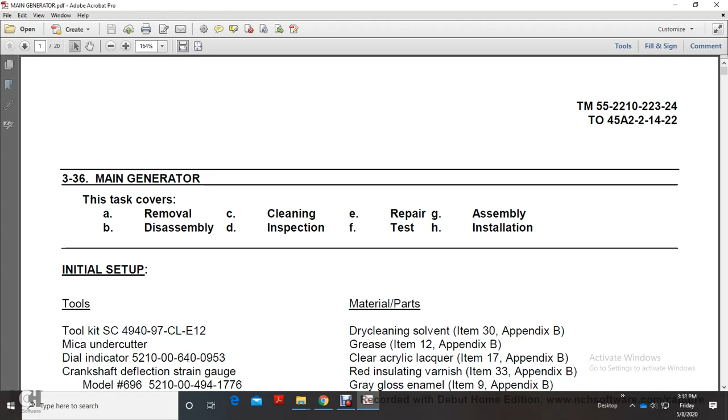Main generator removal, disassembly, cleaning, inspection, repair, test, assembly, and installation. Toolkit required.

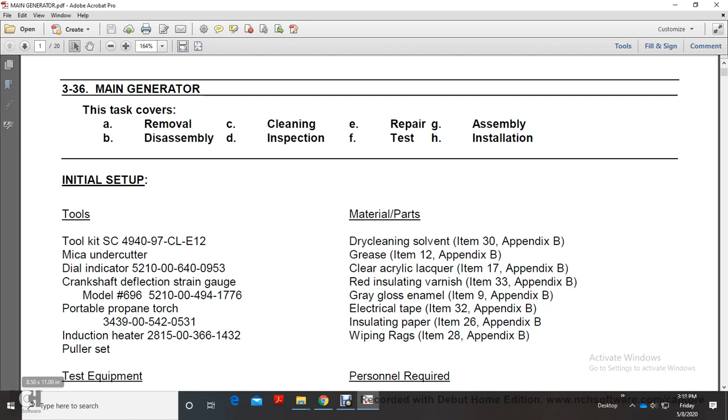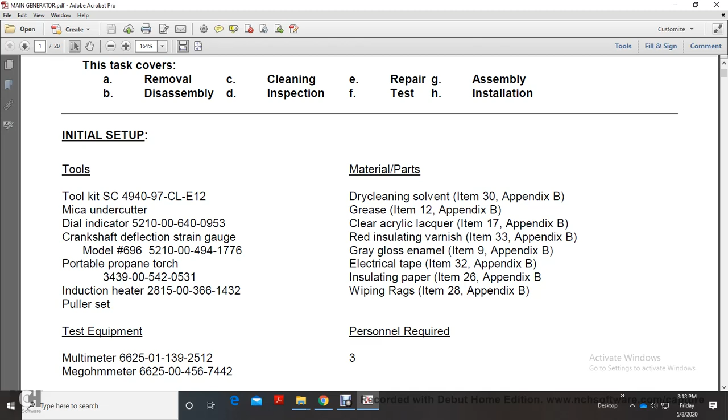Equipment needed: SC494097CLE12 mica undercutter, dial indicator, crankshaft deflection strain gauge, portable propane torch, induction heater, puller set, test equipment, multimeter, mega ohm meter, dry cleaning solvent, grease, clear acrylic lacquer, red insulation varnish, gray gloss enamel, electrical tape, insulating paper, wiping rags. Personnel required.

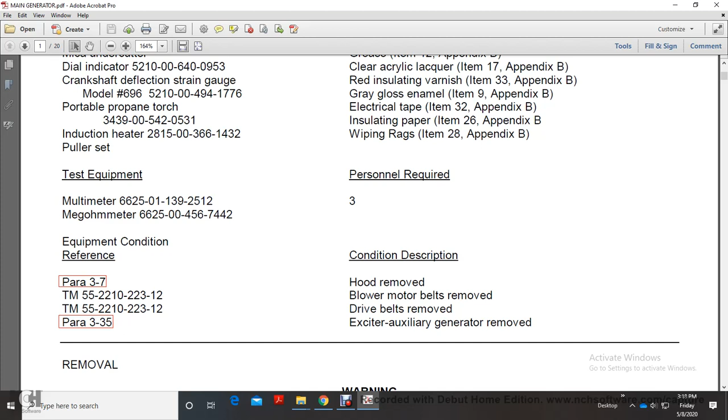Condition description: hood removed, blower motor belts removed, drive belts removed, exciter auxiliary generator removed.

Warning: remove rings, bracelets, wristwatches, and neck chains before working around the locomotive. Jewelry can catch on equipment, cause injury, may short across electrical circuits, and cause severe burns or electrical shock.

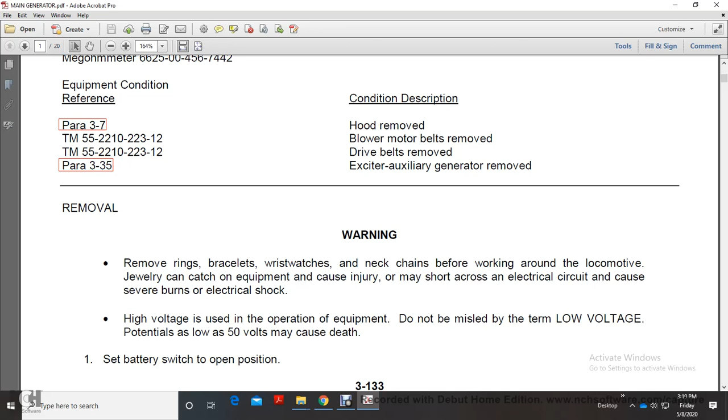High voltage is used in the operating equipment. Do not be misled by the term low voltage; potential as low as 50 volts may cause death. Set battery switch to open position.

Note: if the repair of the main generator is limited to resurfacing the commutator, refer to step 54f(l) below.

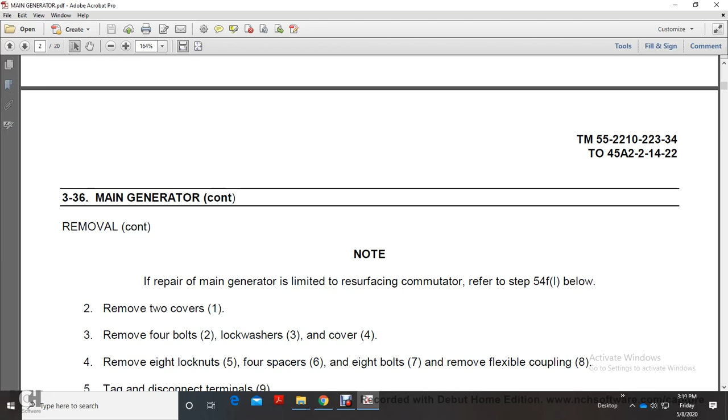Remove 2 covers (1). Remove 4 bolts (2), lock washers (3), cover (4). Remove 8 lock nuts (5), 4 spacers (6), 8 bolts (7).

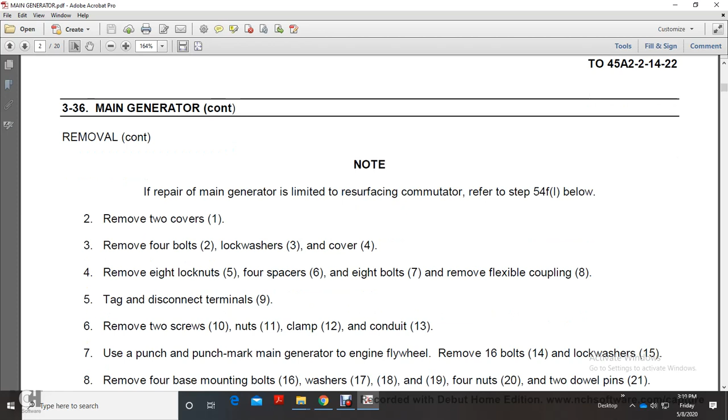Remove flexible coupling (8). Tag disconnect terminals (9). Remove 2 screw nuts, clamp (12). and conduit (13). Use a punch to mark the main generator to the engine flywheel.

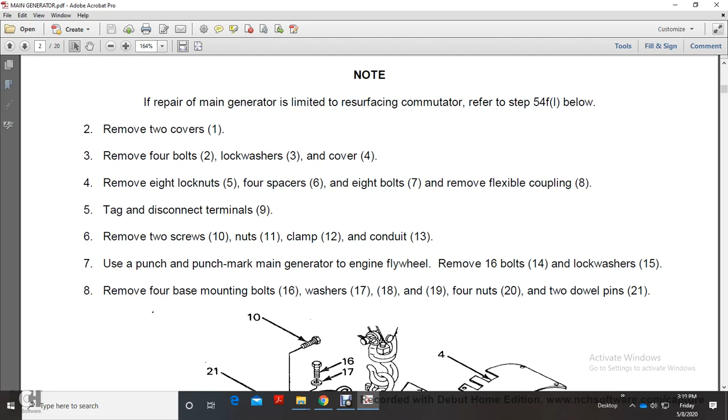Remove 16 bolts (14), lock washers (15). Remove 4 base mounting bolts (16), washers (17, 18, 19), 4 nuts (20), 2 dowel pins (21).

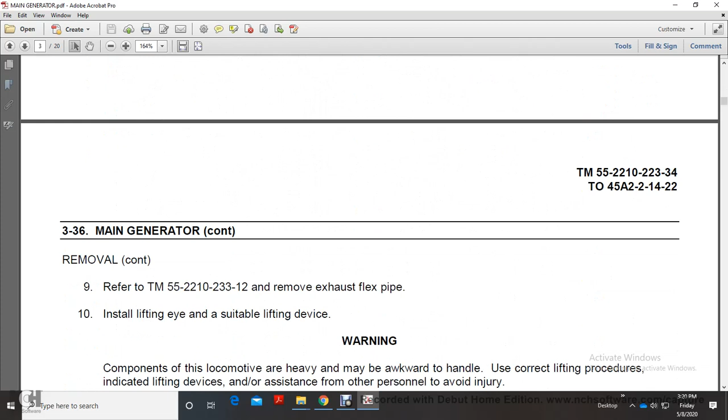Refer to technical manual 55-2210-233-12. Remove exhaust flexible pipe, install lifting eye and suitable lifting devices.

Warning: components of a locomotive are heavy and may be awkward to handle. Use correct lifting procedures and indicate lifting device assistance for other personnel to avoid injury. Caution: use extreme care to prevent main generator damage.

Emergency fuel shut off assembly. Move main generator toward air compressor. Slowly lift main generator from base and place on a suitable support device in a horizontal position.

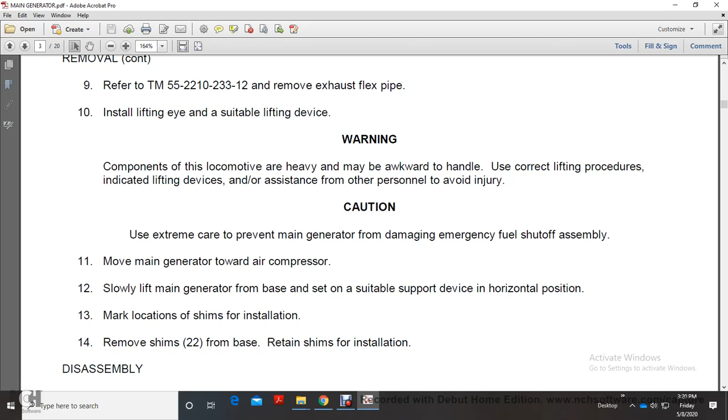Mark location of shims for installation. Remove shims (22) from the base. Retain shims for installation.

Disassembly. Warning: components of the main generator are heavy and may be awkward to handle. Use correct lifting procedures, indicate lifting devices, and assistance of other personnel to avoid injury. Heated parts may cause injury if hand protection is not worn when handling; wear protective gloves for maximum protection. Note: some parts may need to be heated to release them from their shrink fit.

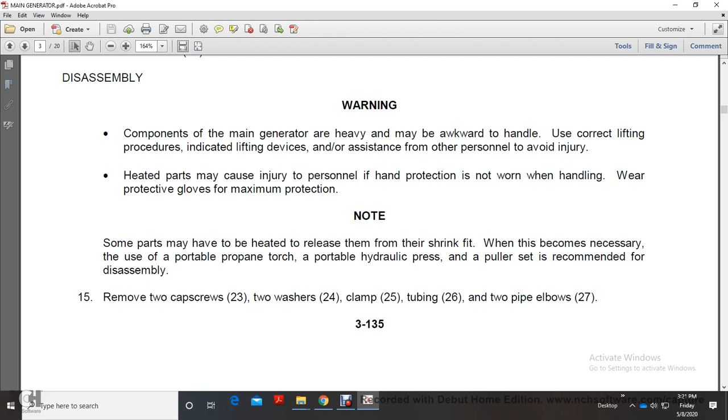When heating becomes necessary, use of a portable propane torch, a portable hydraulic press, and a puller set is recommended for disassembly. Remove 2 cap screws (23), 2 washers (24), clamp (25), tubing (26), 2 pipe elbows (27).

Remove nut (28), lock washers (29), then reinstall the nut to serve as a stop when pulley (30) is removed. Install pry bars between stator frame (55) and pulley (30). Use a torch to heat the pulley (30), apply pressure to the pulley, and loosen it.

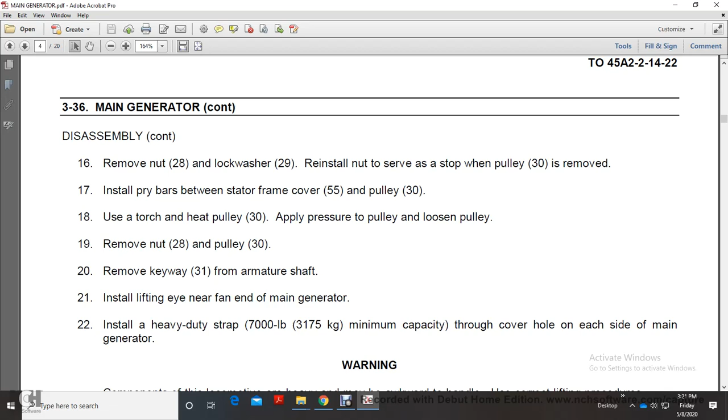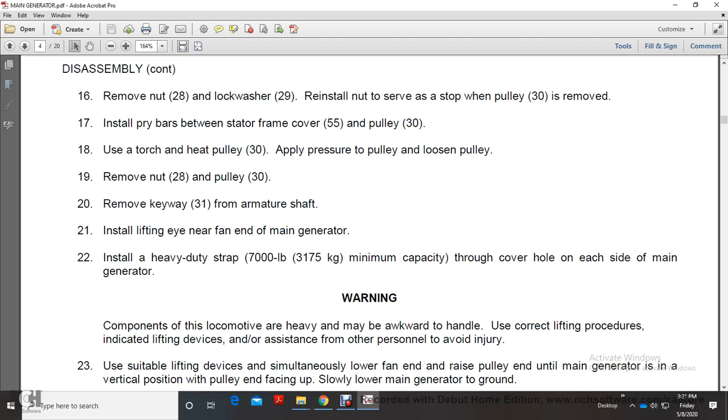Remove nut (28), pulley (30), and keyway (31) from the armature shaft, and install a lifting eye at the fan end of the main generator frame. Install a heavy duty strap, 7,000-pound minimum capacity, through the cover hole on each side of the main generator.

Warning: components of the locomotive are heavy and may be awkward to handle. Use correct lifting procedures, indicated lifting devices, and assistance of other personnel to avoid injury.

Use suitable lifting devices to simultaneously lower the fan end and raise the pulley end until the main generator is in a vertical position with the pulley end facing up, then slowly lower the main generator to the ground.

Remove 8 bolts (32), washers (33). Use the spring to hold brushes from the holder. Lift brushes far enough out of the brush box to prevent them from sliding back against the commutator.

Wrap a piece of insulating paper around the commutator to protect it while handling, and install lifting eyes on each side of the stator frame (55).

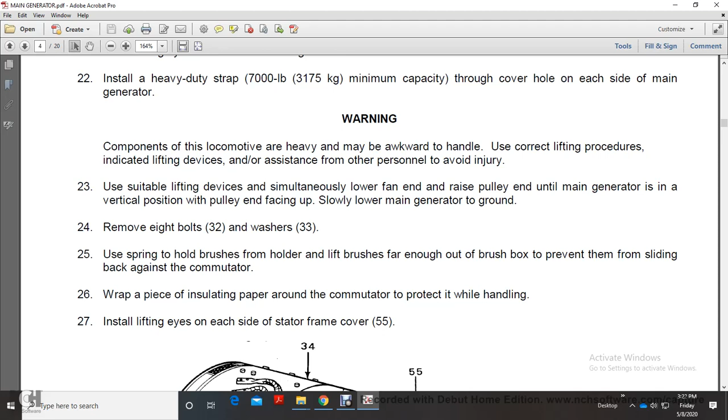Use a suitable lifting device and slowly lift the stator frame assembly (34) and armature (43), then lower the stator frame assembly to the ground to rest on a suitable support device.

Install wooden blocks under the bearing cartridge (42) to prevent it from sliding down on the shaft. Remove 6 bolts (35), washers (36). Remove outer bearing cap (37), gasket (38).

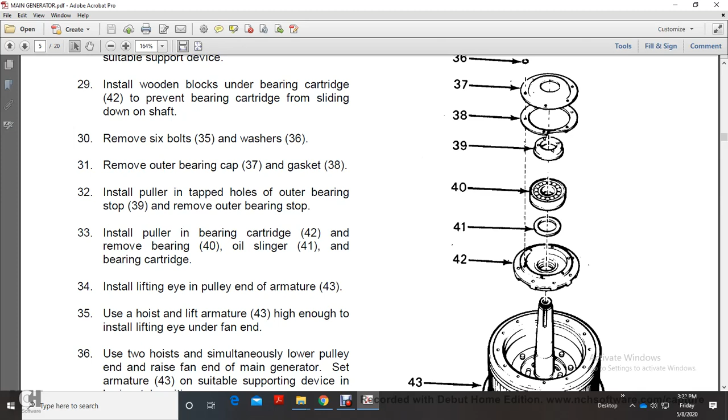Install puller in tapped holes of outer bearing stop (39). Remove outer bearing stop, install puller on bearing cartridge (42). Remove bearing (40), oil slinger (41), and bearing cartridge.

Install a lifting eye at the pulley end of the armature (43). Use the hoist to lift the armature high enough to install a lifting eye under the fan end. Use 2 hoists to simultaneously lower the pulley end and raise the fan end of the main generator.

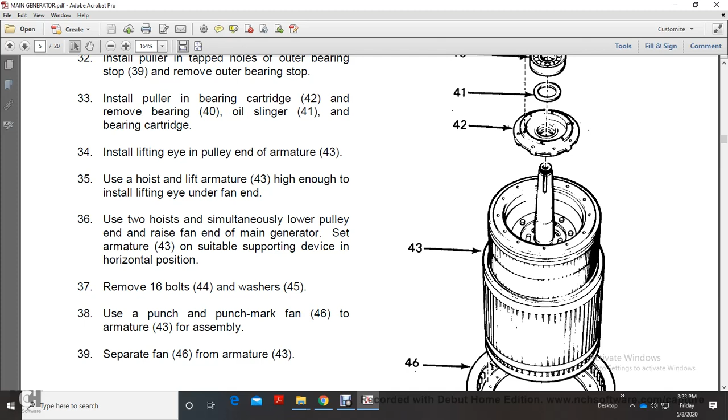Set the armature on a suitable supporting device in the horizontal position. Remove 16 bolts (44), washers (45). Use a punch to mark fan (46) to armature (43) for reassembly.

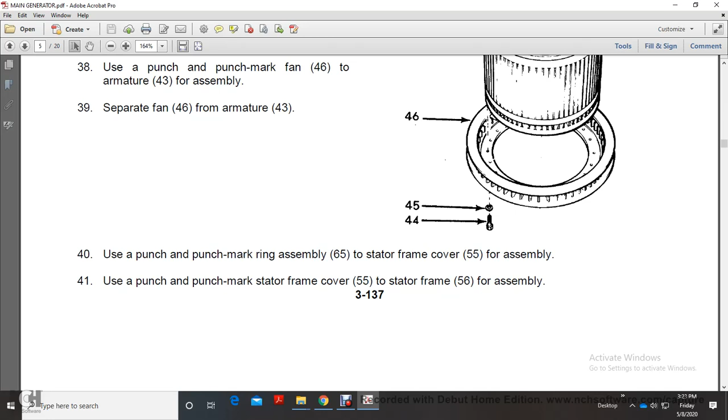Separate the fan (46) from the armature (43). Use a punch to mark the rings (65) to the stator frame cover (55) for assembly. Use a punch to mark the stator frame cover (55) to the stator frame (56) for assembly.

Disassembly continued: remove 8 bolts (47), lock washers (48). Remove 8 bolts (49), 8 lock washers (50), washers (51). Remove 2 bolts (52).

Remove clips (53). Remove lifting eyes, install 3 jacking bolts (54) into the stator frame cover (55). Separate the stator frame cover from the stator frame (56). Remove jacking bolts (54) while installing lifting eyes.

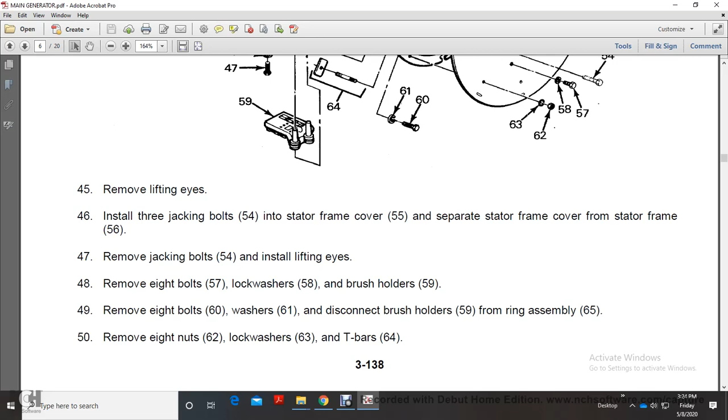Remove 8 bolts (57), lock washers (58), brush holder (59). Remove 8 bolts (60), washers (61). Disconnect brush holder (59) from ring assembly (65). Remove 8 nuts (62), lock washers (63), T-bars (64).

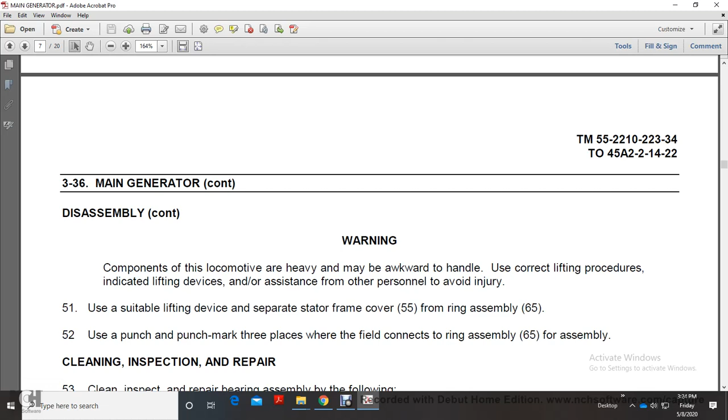Warning: components of the locomotive are heavy and may be awkward to handle. Use the correct lifting procedure, indicate lift device, and/or assistance from other personnel to avoid injury. Use suitable lift device and separate stator frame cover from the ring assembly 65. Use punch and punch mark 3 places where the field connects to the ring assembly 65 for assembly.

Cleaning, inspection, and repair of bearing assembly: dry clean solvent PD 680 is toxic and flammable. Wear protective gloves and goggles. Use only in well ventilated areas. Avoid skin and eye contact. Do not breathe vapors. Do not use near open flame.

Excessive heat, flash point of 100 to 138 degrees Fahrenheit. If you become dizzy, get fresh air immediately and get medical aid. If contact with the eyes is made, wash your eyes and get medical aid immediately. Compressed air used for cleaning purposes will not exceed 30 psi. Do not use the compressed air against skin. Use goggles and full face shield.

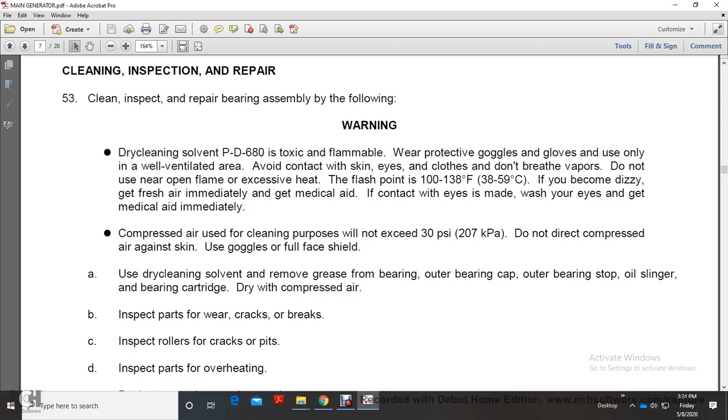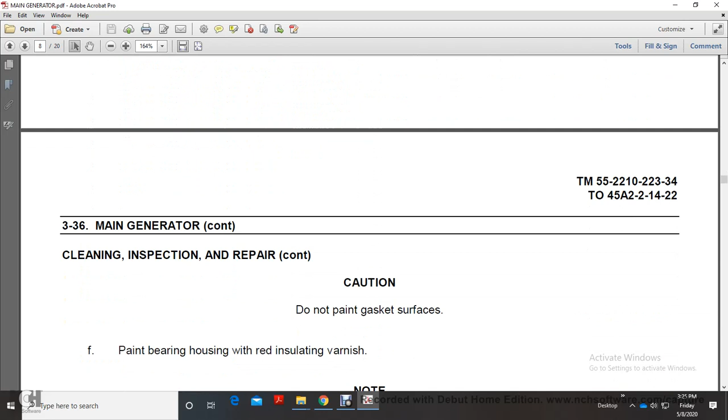Use dry cleaning solvent to remove grease from the bearing, outer bearing cap, outer bearing stop, oil slinger, and bearing cartridge, then dry with compressed air. Inspect parts for wear, cracks, and breaks. Inspect rollers for cracks and pits, and inspect parts for overheating; replace any that are damaged. Caution: do not paint gasket surfaces. Paint bearing housing with red insulating varnish.

Note: armature must be repaired at a depot maintenance level facility.

Cleaning, inspection, and repair of armature assembly: dry cleaning solvent PD 680 is toxic and flammable. Wear protective goggles and gloves. Use only in well ventilated areas. Avoid contact with skin, eyes, and clothes. Do not breathe vapors. Do not use near open flame.

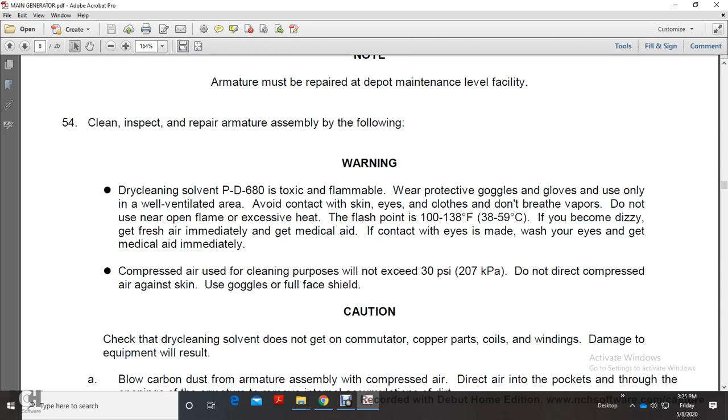Excessive heat with a flash point of 100 to 138 degrees Fahrenheit. If you become dizzy, get fresh air immediately and get medical aid. If contact with the eyes occurs, wash your eyes and get medical aid immediately. Compressed air used for cleaning purposes should not exceed 30 psi. Do not use direct air against your skin. Use goggles and full face shield.

Caution: check that dry cleaning solvent does not get on the commutator copper parts or coil windings, as it can cause damage to equipment. As a result, blow carbon dust off the armature assembly with compressed air. Direct air into the pockets through the opening of the armature to remove internal accumulation of dirt.

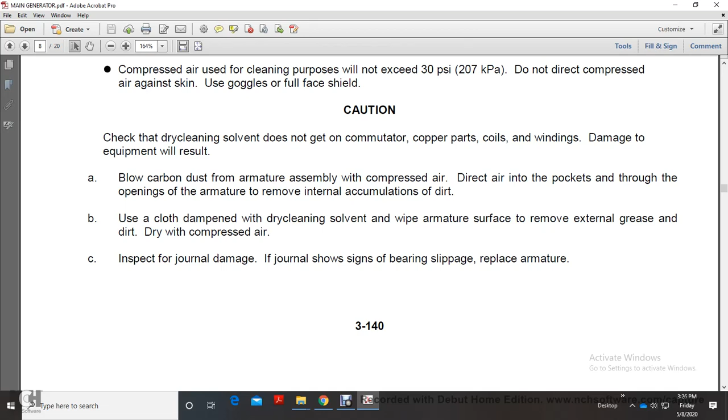Use a cloth dampened with cleaning solvent to wipe the armature surface and remove external grease and dirt, then dry with compressed air. Inspect the journal for damage showing bearing slippage and replace the armature if needed.

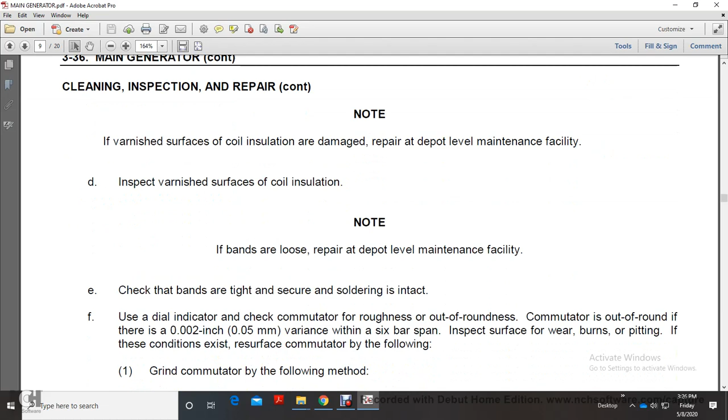If the varnish surface of the coil insulation is damaged, repair at the depot level maintenance facility. Inspect the varnish surface for the coil insulation. If the bands are loose, repair at the depot level maintenance facility. Check that the bands are tight and secure, with the soldering intact.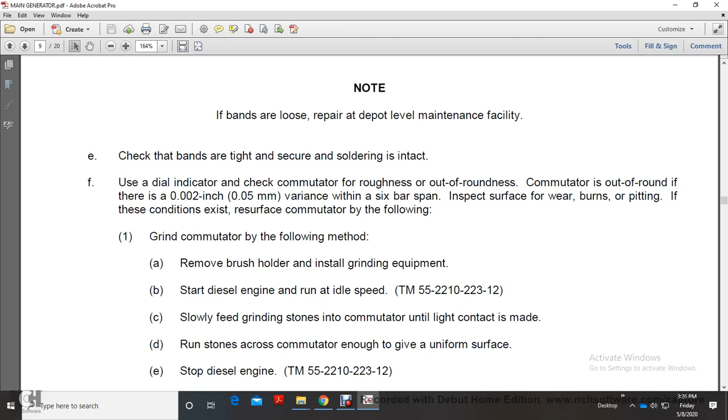Use a dial indicator to check commutator roughness and out-of-roundness. The commutator out-of-roundness should have no more than 2 thousandths of an inch variance over the 6-bar span. Inspect the surface for wear, burns, and pitting. If these conditions exist, resurface the commutator by the following method.

Grind the commutator by the following method: remove the brush holder, install the grinding equipment, start the diesel engine, and run to idle speed, per TM 55-2210-223-12.

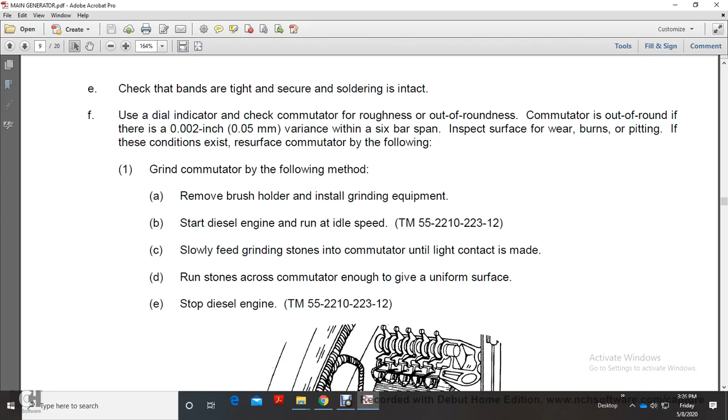Slowly feed the grinding stone to the commutator until light contact is made. Run the stone on the commutator enough to give it a uniform surface. Stop the diesel engine, per TM 55-2210-223-12.

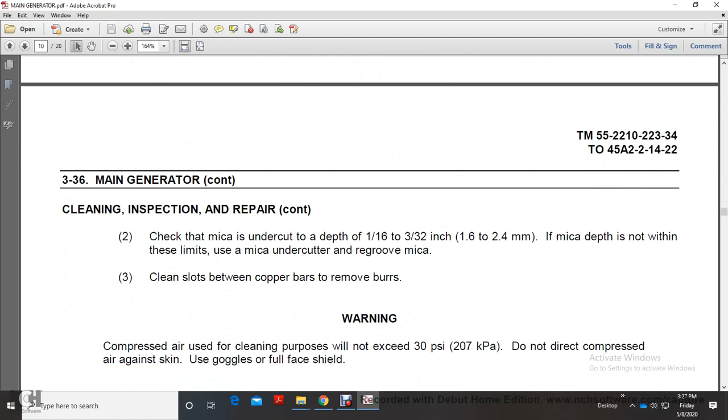Check the mica undercut to a depth of 1/16 to 3/32 of an inch. If the mica depth is not within these limits, use a mica undercutter and re-groove the mica. Clean slots between the copper bars.

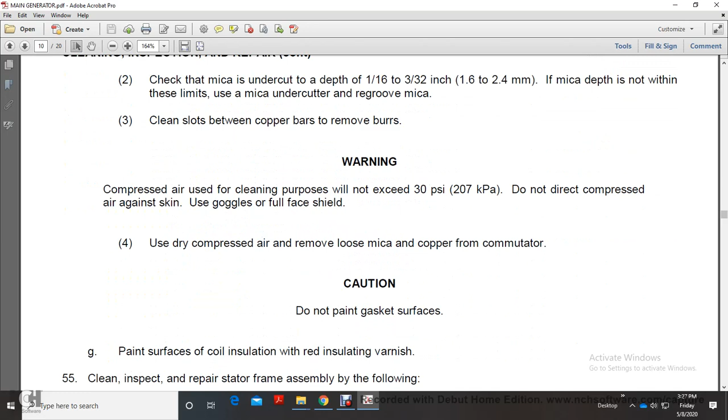Remove burrs. Warning: compressed air used for cleaning purposes will not exceed 30 psi. Do not use direct compressed air against skin. Use goggles or full face shield. Use dry compressed air to remove loose mica and copper from the commutator.

Caution: do not paint gasket surfaces. Paint surfaces of coil insulation with red insulation varnish.

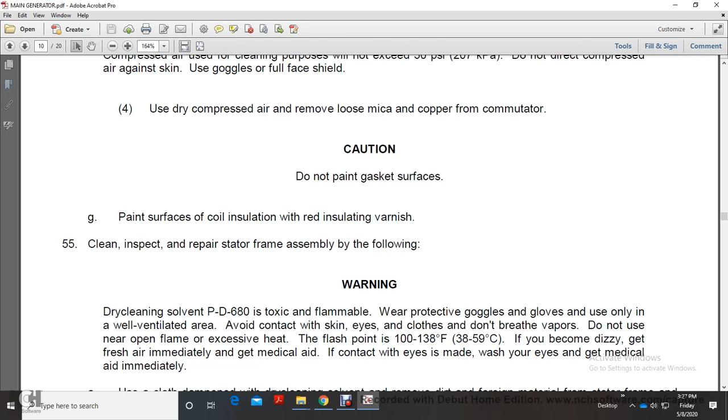Clean, inspect, and repair the stator frame assembly by the following: Warning: dry cleaning solvent PD 680 is toxic and flammable; use protective goggles and gloves, and use only in well ventilated areas. Avoid contact with skin and eyes. Do not breathe vapor. Do not use near open flame or excessive heat.

Flash point of 100 to 138 degrees Fahrenheit. If you become dizzy, get fresh air immediately and get medical aid. If contact is made with the eyes, wash your eyes and get medical aid immediately.

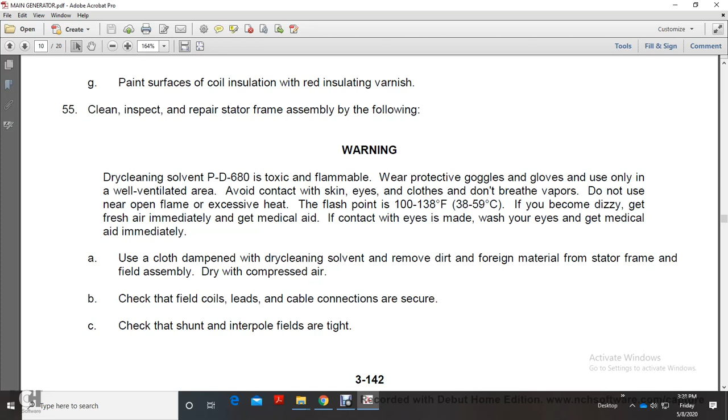Use a cloth dampened with dry cleaning solvent to remove dirt and foreign material from the stator frame and field assembly, then dry with compressed air. Check that the field coil leads and cable connections are secure. Check that the shunt and interpole fields are tight.

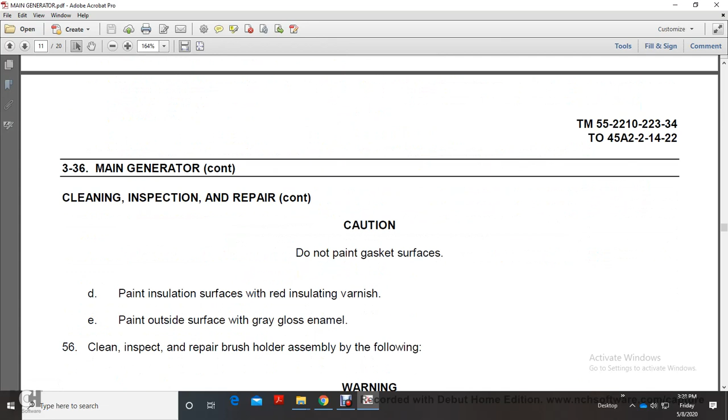Caution: do not paint gasket surfaces. Paint insulation surfaces with red insulation varnish, and paint outside surfaces with gray gloss enamel. Clean, inspect, and repair brush holder assembly by the following.

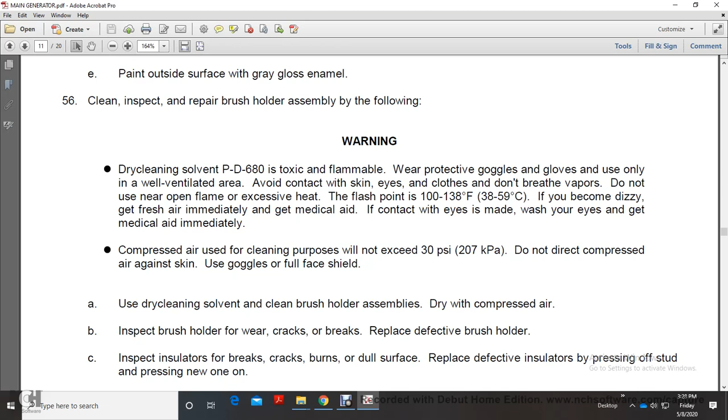Warning: dry cleaning solvent PD 680 is toxic and flammable. Wear protective goggles and gloves, and use only in a well-ventilated area. Keep it off skin and hands, and do not breathe the vapors. Do not use near open flame or excessive heat; flash point is 100 to 138 degrees Fahrenheit. If you become dizzy, get fresh air immediately and seek medical aid. If contact with the eyes occurs, wash your eyes and get medical aid immediately.

Compressed air used for cleaning purposes should not exceed 30 psi. Do not use compressed air against skin. Use goggles or a full face shield. Clean the brush holder with dry cleaning solvent, then dry assembly with compressed air. Inspect the brush holder for wear, cracks, and breaks. Replace the defective brush holder.

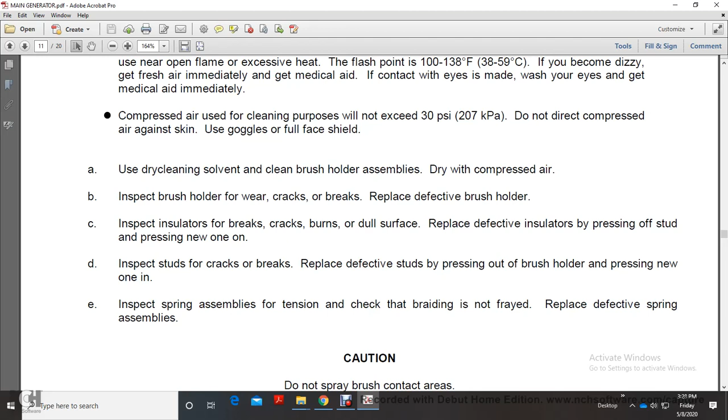Inspect the insulator for breaks, cracks, burns, or dull surfaces. Replace a defective insulator by pressing off the old stud and pressing on a new one. Inspect studs for cracks and breaks. Replace defective studs by pressing off the brush holder and pressing a new one in.

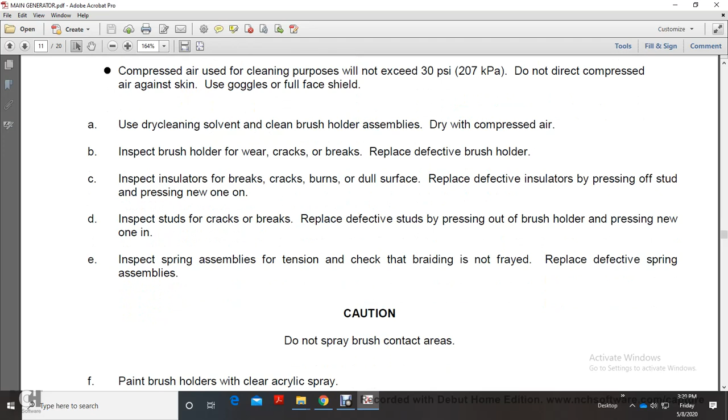Inspect the spring assembly with a tension check to ensure the braiding is not frayed. Replace the defective spring assembly. Caution: do not spray the brush contact areas. Paint brush holders with clear acrylic spray.

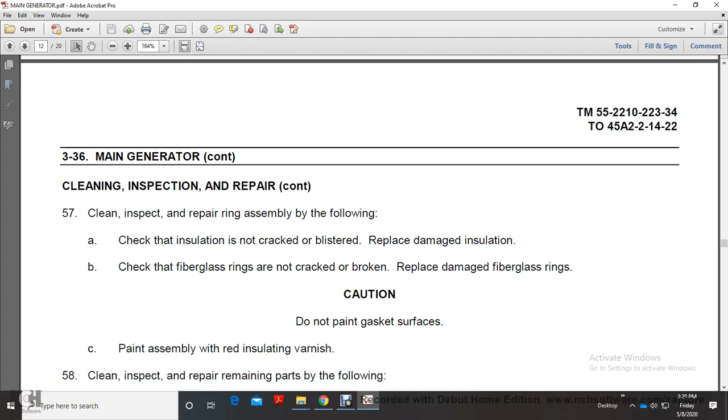Clean, inspect, and repair the ring assembly as follows. Check that the insulation is not cracked or blistered, and replace damaged insulation. Check that the fiberglass rings are not cracked or broken, and replace damaged fiberglass rings. Caution: do not paint gasket surfaces. Paint the assembly with red insulating varnish.

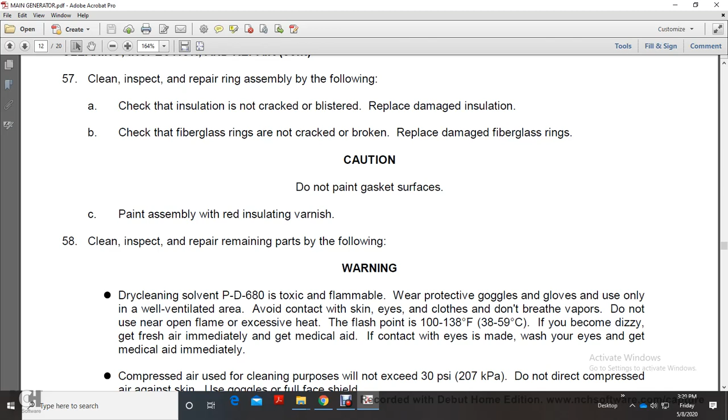Clean, inspect, and repair the remaining parts as follows. Warning: dry cleaning solvent PD 680 is toxic and flammable. Wear protective goggles and gloves, and use only in a well-ventilated area. Avoid contact with the skin, eyes, and clothes. Do not breathe vapors, and do not use near open flames or excessive heat; flash point is 100 to 138 degrees.

If you become dizzy, get fresh air immediately and seek medical aid. If contact with the eyes is made, wash your eyes and get medical aid immediately. Compressed air used for cleaning purposes should not exceed 30 psi. Do not use compressed air against skin. Use goggles or a full face shield. Use dry cleaning solvent to clean parts, then dry with compressed air.

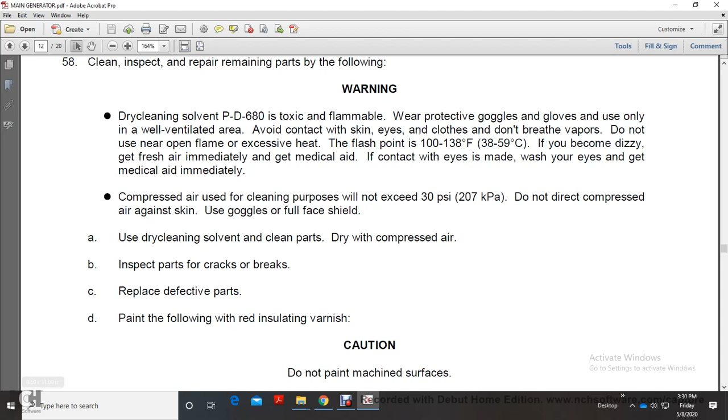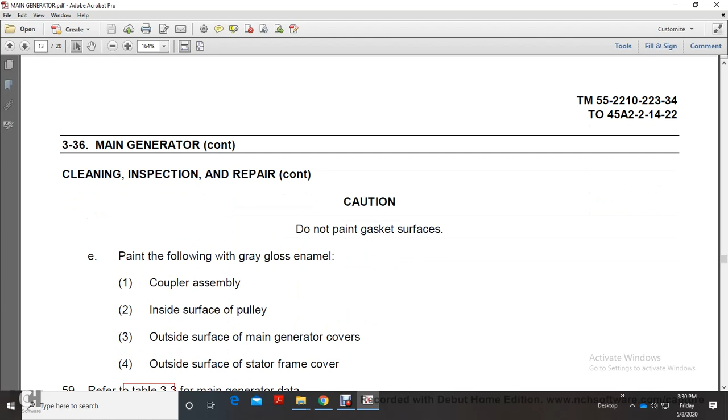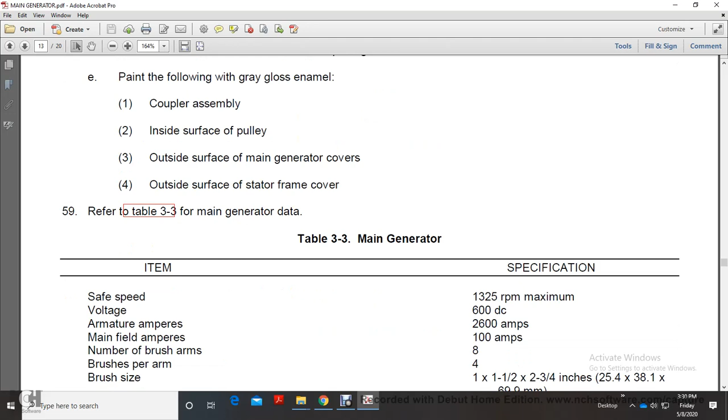Inspect parts for cracks or breaks, and replace defective parts. Paint with red insulating varnish. Caution: do not paint machined surfaces such as the fan, inside surfaces of the stator frame cover, or inside surfaces of the main generator covers. Caution: do not paint gaskets. Paint the following with gray gloss enamel: coupler assembly, inside surface of pulley, outside surface of the main generator covers, and outside surface of the stator frame cover. Refer to table 3-3 for main generator data.

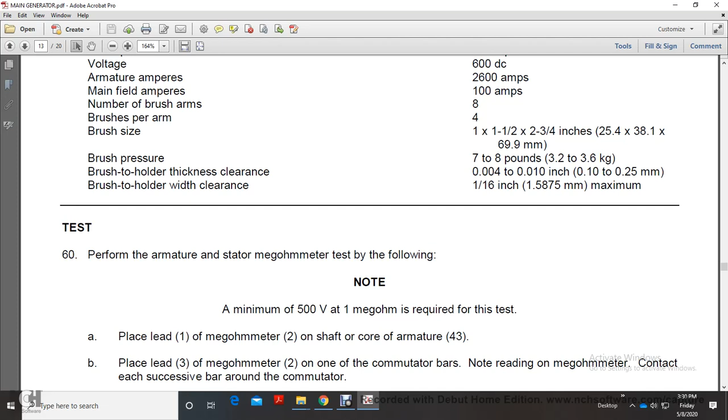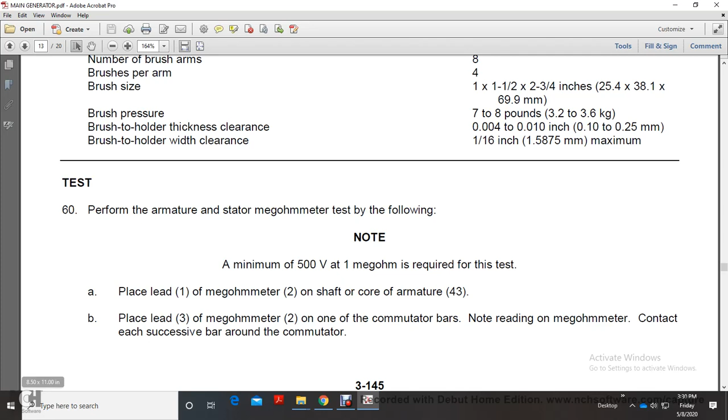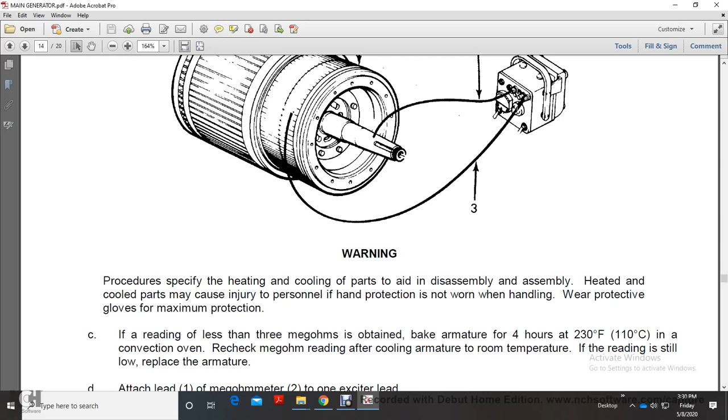Warning: this procedure specifies heating and cooling of parts during disassembly and assembly. Heated or cooled parts may cause injury if hand protection is not worn when handling. Wear protective gloves for maximum protection. If a reading less than the required mega ohm is obtained, bake the armature for 4 hours at 230 degrees in a convection oven, then recheck the mega ohm meter reading after the armature cools to room temperature. If the reading is still low, replace the armature.

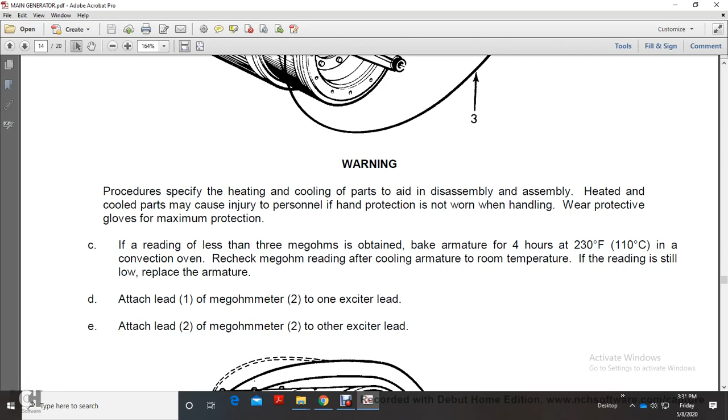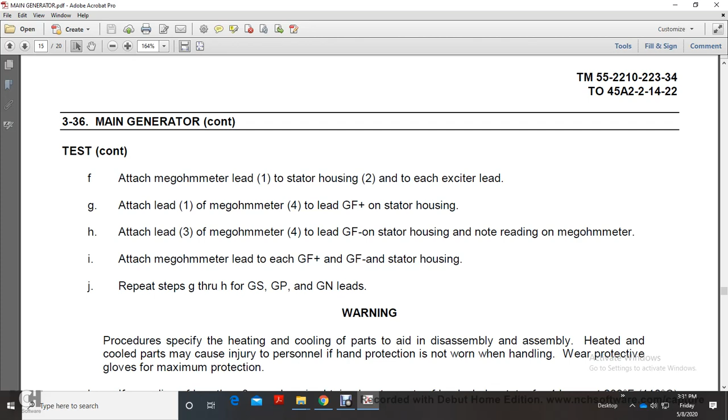This procedure specifies heating and cooling of parts during disassembly and assembly. Heated and cooled parts may cause injury if hand protection is not worn when handling. Wear protective gloves for maximum protection. If the reading is less than 3 mega ohms on two sets of leads, bake the stator for 4 hours at 230 degrees Fahrenheit in a convection oven, then recheck the mega ohm meter readings after cooling the stator to room temperature. If the readings are still low, replace the stator.

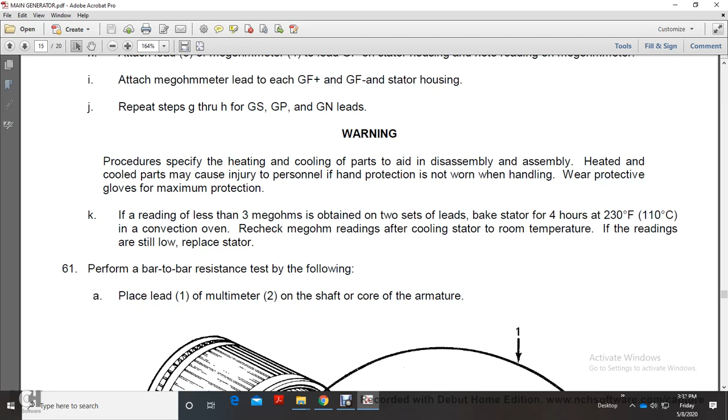Perform the bar-to-bar resistance test as follows. Place lead 1 of the multimeter on the shaft or core of the armature, and place lead 3 of the multimeter on the commutator bars. Record the reading on the multimeter, then contact successive bars around the commutator and record each reading.

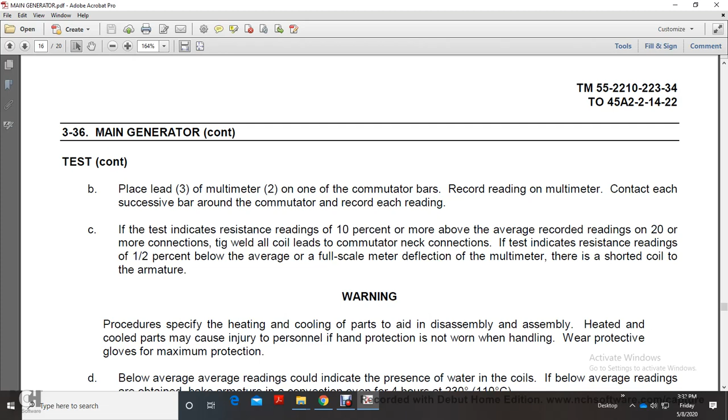Warning: this procedure specifies heating and cooling of parts during disassembly and assembly. Heated and cooled parts may cause injury if hand protection is not worn when handling. Wear protective gloves for maximum protection.

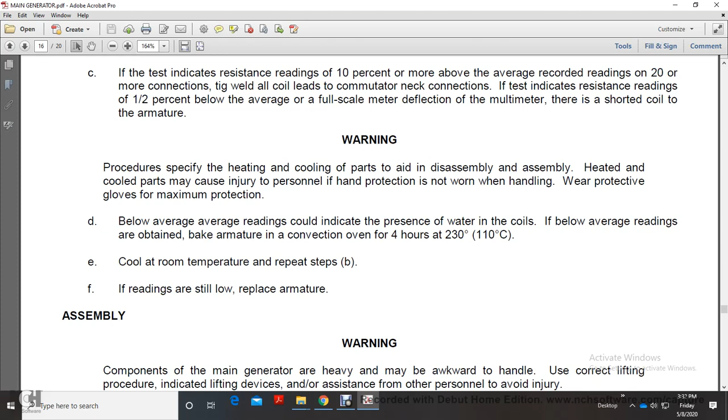Below-average readings can indicate the presence of water in the coil. If below-average readings are obtained, bake the armature in a convection oven for 4 hours at 230 degrees, cool to room temperature, and repeat step B. If the reading is still low, replace the armature.

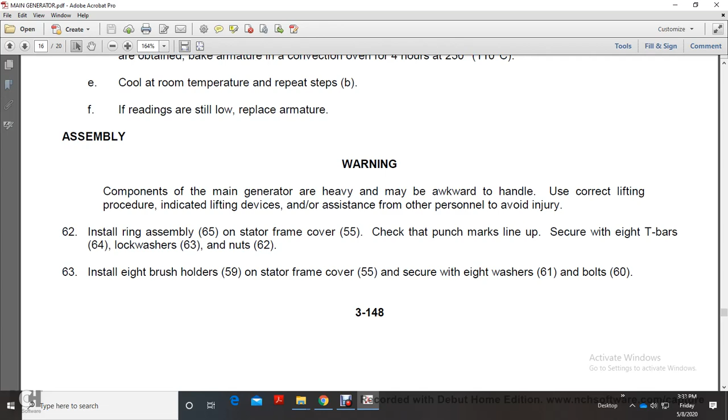Alright, assembly. Warning: components of the main generator are heavy and may be awkward to handle. Use the correct lifting procedure. Use a lifting device and assistance from other personnel to avoid injury. Install ring assembly 65 on stator frame 55. Check for the punch marks. Line up and secure with the 8 T-bars 64, lock washers 63, nuts 62. Install 8 brush holders 59 on stator frame 55 with the screws, 8 washers 61, bolts 60.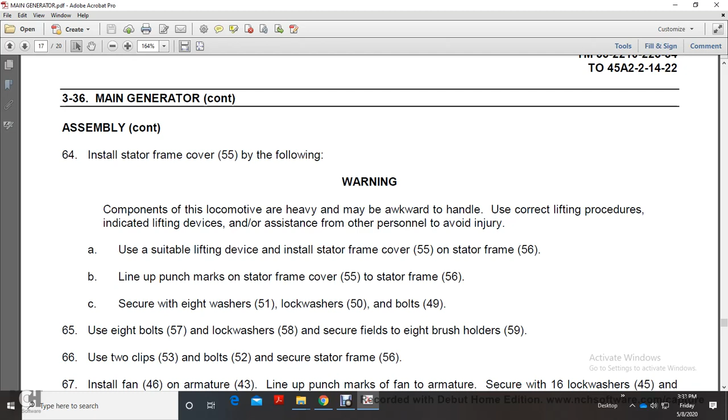Install stator frame cover 55 as follows. Warning: components of the locomotive are heavy and may be awkward to handle. Use correct lifting procedure, a lifting device and assistant personnel to avoid injury. Use a suitable lifting device. Install stator frame cover 55 on stator frame 56. Line up punch marks on stator frame cover 55 with stator frame 56. Secure with the 8 washers 51, lock washers 50, bolts 49.

Use 8 bolts 57, lock washers 58. Secure the 8 field brush holders 59. Use 2 clips 53, bolts 52. Secure stator frame 56. Install fan 46 on armature 43. Line up punch marks on the fan and armature. Secure with the 16 lock washers 45 and the bolts 44.

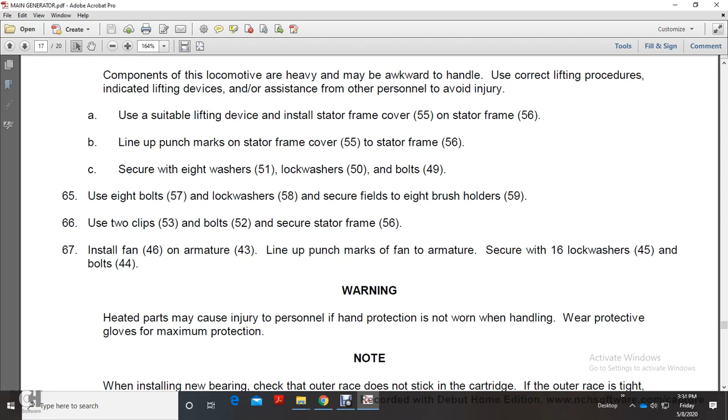Warning: heated parts can injure personnel if hand protection is not worn. When handling, wear protective goggles and gloves for maximum protection. When installing a new bearing, check that the outer race does not stick against the cartridge. If the outer race is tight, the housing must be lapped to a loose fit; clearance should be between 0.001 and 0.002 of an inch.

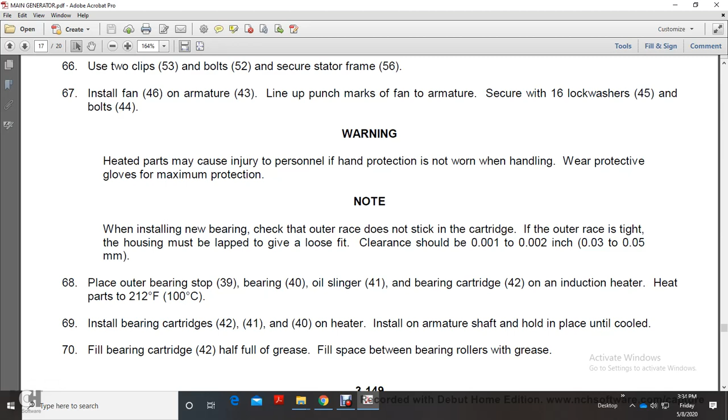Place outer bearing stop 39, bearing 40, oil slinger 41, and bearing cartridge 42 on the induction heater. Heat parts to 212 degrees Fahrenheit. Install bearing cartridge 42, 41, and 40 from the heater on the armature shaft, holding in place until cool. Fill bearing cartridge 42 half full of grease, and fill space between bearing rollers with grease.

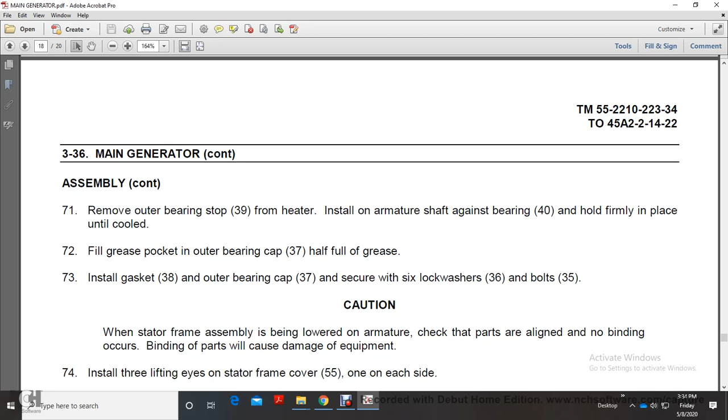Alright, remove outer bearing stop 39 from the heater. Install on armature shaft against bearing 40. Hold firmly in place until cold. Fill grease pockets of outer bearing cap 37 half full of grease. Install gasket 38 and outer bearing cap 37. Secure with the 6 lock washers 36 and bolts 35.

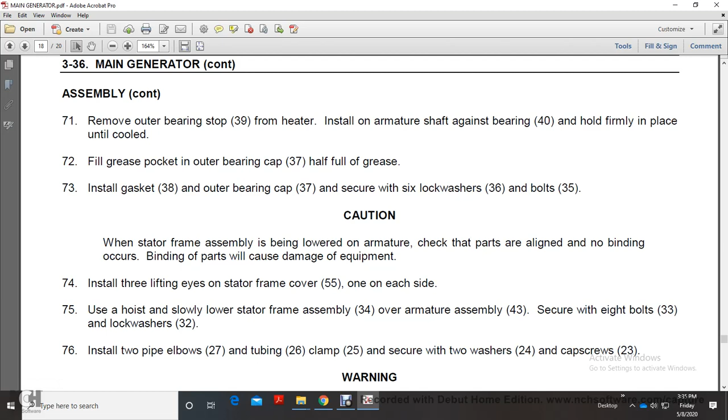When the stator frame is slowly lowered over the armature, check that the parts line up with no binding, because binding of the parts will cause damage to the equipment. Install the 3 lifting eyes on the stator frame cover 55 on each side. Use the hoist to slowly lower the stator frame assembly over the armature assembly 43. Secure with the 8 bolts 33 and lock washers 32. Install 2 pipe elbows 27, tubing 26, clamp 25. Secure with 2 washers 24, cap screws 23.

Warning: heated parts can cause injury to personnel if hand protection is not worn when handled. Wear protective gloves for maximum protection. Put key 31 in armature shaft keyway. Place pulley 30 on the induction heater and heat parts up to 212 degrees Fahrenheit. Remove pulley 30 from the heater. Install on armature shaft. Hold pulley firmly until cooled. Install lock washer 29, nut 28. Install brushes. Refer to TM 55-2210-223-12 for brush adjustment data.

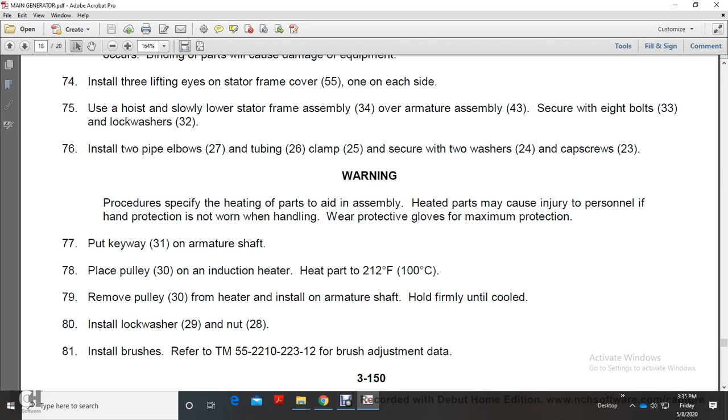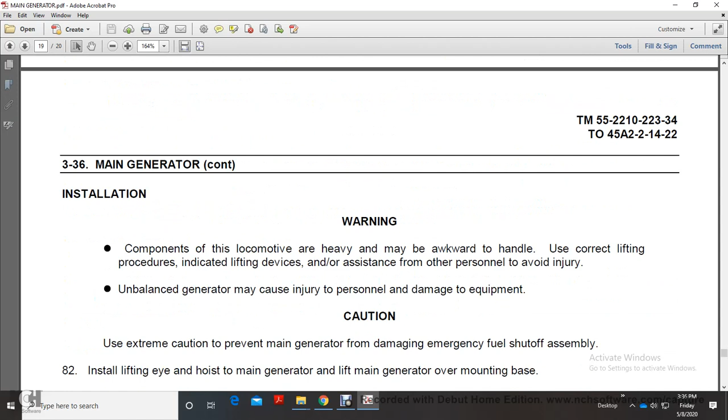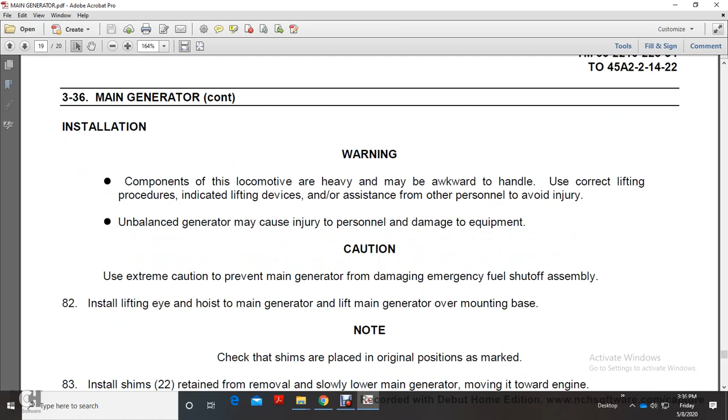Alright, installation. Warning: components of the locomotive are heavy and may be awkward to handle. Use correct lifting procedure, a lifting device and assistant personnel to avoid injury. An unbalanced generator may cause injury to personnel and damage to the equipment. Caution: use extreme caution to prevent main generator from damaging emergency fuel shut off assembly. Install lifting eye and hoist. Lift main generator onto mounting base.

Check that the shims are in place in their original marked positions. Install shims 22. Slowly lower, moving the main generator toward the engine. Check punch marks on engine flywheel and main generator line up. Install 16 bolts 14, lock washers 15 on opposite ends of each other, tightening and pulling main generator and engine flywheel together. Install main generator on base with 4 base mounting bolts 19, lock washers 18, flat washers 17, 4 nuts 20.

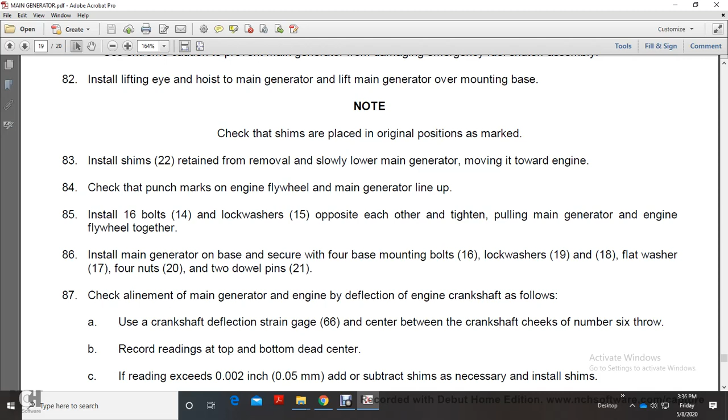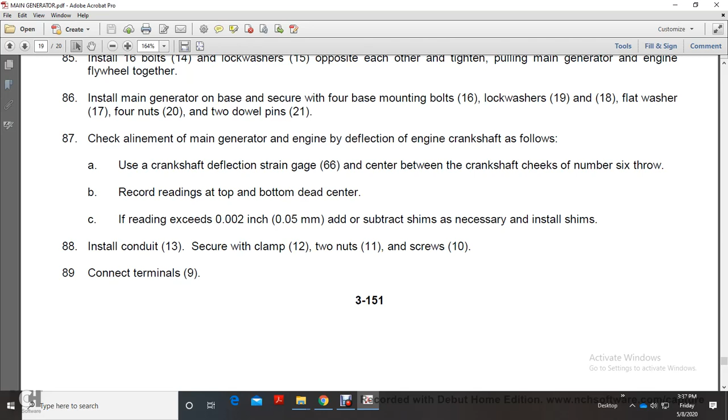Install 2 dowel pins 21. Check alignment of the main generator by engine crankshaft deflection as follows. Using a crankshaft deflection strain gauge, check the crankshaft cheeks at number 6 throw and record readings at top and bottom dead center. If the reading exceeds 2 thousandths of an inch, add or subtract shims as necessary. Install shims. Install conduit 13, secure with clamp 12, 2 nuts 11, screws 10, connect terminals 9.

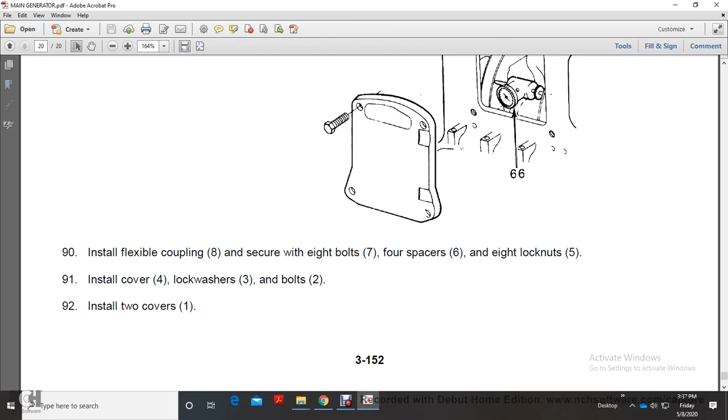And then it shows the picture. Install flexible coupling 8 and secure with 8 housing bolts 7, 4 spacers 6, 8 locknuts 5. Install cover 4, lock washer 3, bolts 2. Install 2 covers 1. Alright, and that was your main generator.